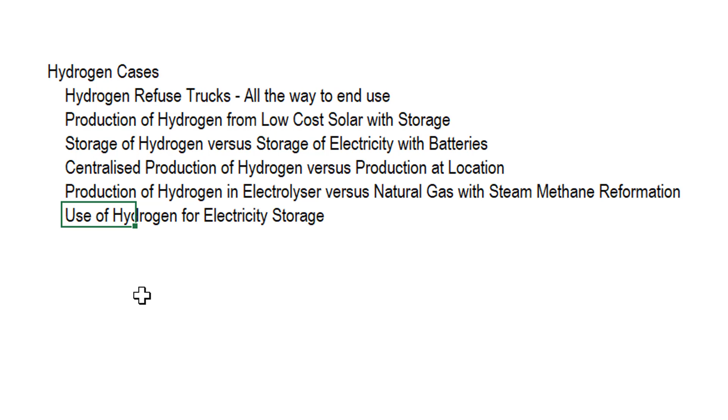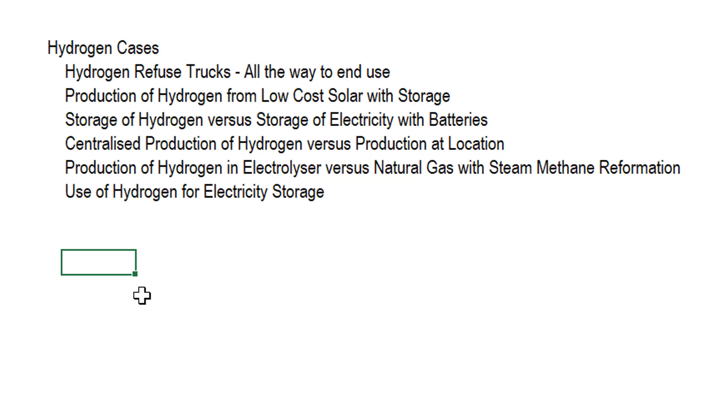And finally, there's this business I'm just hearing about of some kind of perpetual blah blah blah, where the idea is to get solar panels and use the solar panels to produce hydrogen with the electrolyzer, store the hydrogen, then get a fuel cell and basically use the hydrogen as a battery. So those are some of the issues. I hope to have more, and we can do any of this by just creating an LCOE calculator.

Okay, I'm not going to go through making spinner boxes and all that. Let's say we have a high load factor for our electrolyzer. This is only the electrolyzer. You get power, and you put the power into an electrolyzer, and that produces the hydrogen. Later, you might have to store the hydrogen, compress the hydrogen in order to store it, dispense the hydrogen, and get it out here. So there are a lot of parts to this. And I hope I got them right. Maybe I didn't.

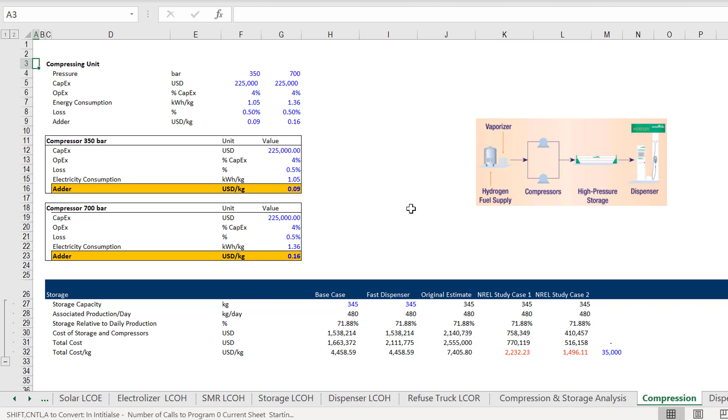Okay. Now, this is getting apparently pretty easy to get. What we did is my friend, I hope I have his name pronounced correctly. He's wonderful. He's been studying, and he's an engineer, and he goes through all these formulas with me, and he's collected all this data. When he collects this data, by the way, it's really interesting. Some people try to argue what the cost of all this stuff is, and then they give you these PowerPoint slides. And in these slides, they say, here's the cost of hydrogen, here's the efficiency and the cost.

And you don't know how it's done, but it's not so hard. Once you get the levelized cost calculator, you can do this yourself. You don't have to rely on some PowerPoint slides and some experts from NREL or someplace to do this. And so he got these different electrolyzer estimates. And then

the key thing is this thing. I don't really understand it, but let's go with it. I don't care, it really doesn't matter. When people talk about the cost of one of these things, they express the capex, the cost, in terms of kilowatts, which is an input, not an output. I don't quite know why you wouldn't express the cost per hydrogen produced, but this is for the capacity.

I guess you could measure in kilowatts, and then we're going to convert the kilowatts to a kilogram of hydrogen, which is the primary measure. And then we've got different efficiencies for different units, and this is like a heat rate that I'm used to in natural gas. The kilowatts is the input, so if we have more inputs per output, it's worse.

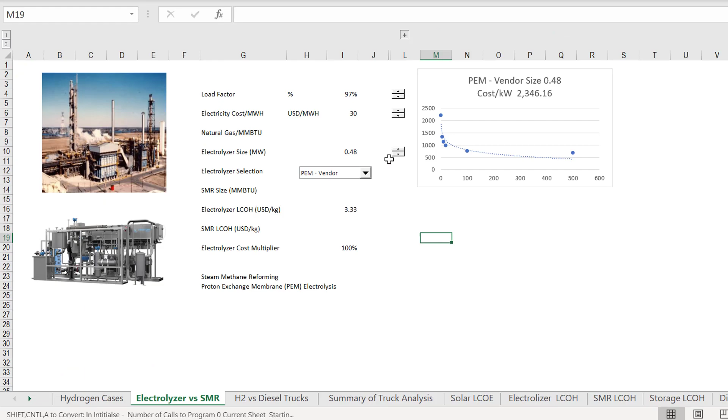The efficiency is different, and this is a proton... ooh, I can't remember the word. I had to write it down. Oh, this is a proton exchange membrane. Okay, good. And there's an alkaline. And Maximiliano says the PEM is better for the environment, and I need to ask him again why.

And then there's some other technologies with different costs and different efficiencies, and we've got to incorporate all of that in our analysis. And this database here, we have the different sizes. Where's the MW? We have larger sizes and smaller sizes and all of this. And what we can do then is just put this together. And where was my electrolyzer analysis?

So here's what you can do when you want to make a graph. I want to make a graph, and I want to put a line here, and I want to say, okay, what's the cost per kW, and how much does the cost go up if the size changes? And we have this data. Now I guess I'll explain it later, but if you want to make a quick graph, just delete the little

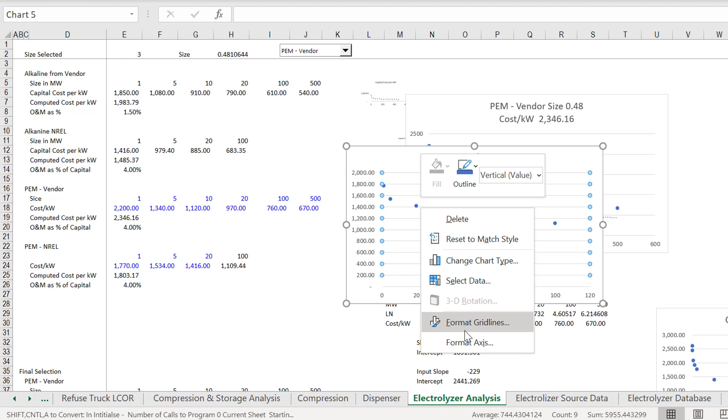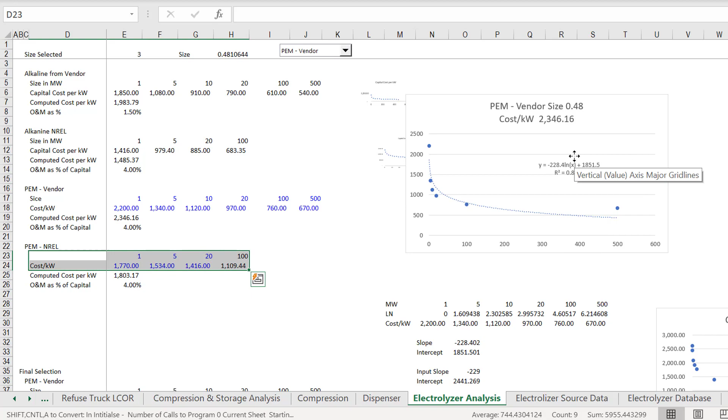thing here, press maybe Alt F1, and then change it around and make it an XY graph, and then just throw this in. Okay, I gotta click on this one, I guess, add a trend line, and get a... a logarithmic. Let's get that, so we can then get some estimates of the economies of scale. Okay, that's the first thing.

Okay, so we can get the cost. This is purely the cost to produce hydrogen. Now I'm going to, of course, go through the detail and try to drill down. What happens if we have a really low cost of electricity? What happens to our cost of our electrolyzer? What happens if we have a different kind of vendor? And what happens if we have a larger versus a smaller kind of unit?

Now, that's a little bit premature, and I haven't put the steam membrane... what was it, steam methane reforming? I haven't done that one yet. Okay, but let's get to the case we're really going to do, which is these refuse trucks. Now, here's an example of a hydrogen refuse truck.

And Mario, if you think because you gave me a picture of this that's violating something and I'm going to take down the video, I'm not going to do that. Sorry, because I got friends who might be interested, like one friend.

Now, this one is a nice diagram. This came from Frederick in the Netherlands, who's been really, really helpful on this stuff. I haven't ever talked to him, and I want to talk to him, but he says, let's take the power in here. I've already shown you this. Put it in an electrolyzer. So we've got to put the LCOE of the power that comes in here. And if you sneak, you can see I've got the LCOE of the power.

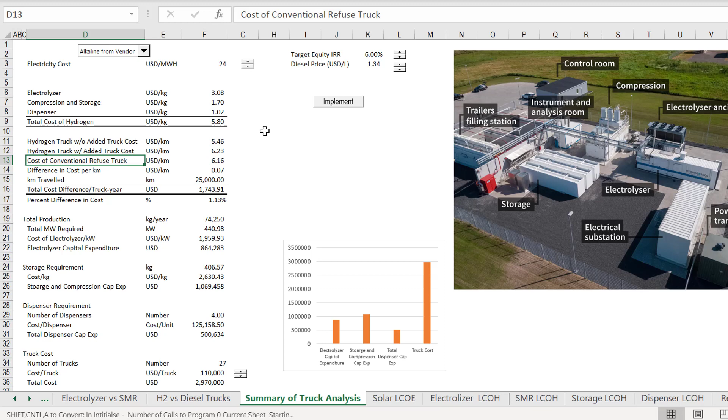And so all we have to do is get a flexible enough financial model. Remember, I'm just an old financial modeler. Okay, and at the end of the day, let's start at the end. We'll get the cost of hydrogen, including all the storage and all that. And then we'll see what the cost of a conventional refuse truck is. I'm not saying lorry because in Australia, I guess they use truck.

And then we get the difference, and then we see how much distance, and you can get kind of how much, in this case, the hydrogen costs more than the refuse. Not surprising. Probably costs a lot more, and it depends on all of these different variables, not the least of which is what kind of rate of return do we really want. Okay.

Now I had to press that for a minute. Now let's just go through some of the assumptions, and for me this is a lot of counting, and there's going to be a problem with storage, which seems to be an inventory problem. Now, let's start with how many kilometers. I kind of start with the demand almost. How many kilometers are we going to drive our truck? So this is all disguised. You can argue that these are a little bit different.

Okay, and then we see what kind of efficiency measure, and we call one of the suppliers and they say, okay, here's how many kilograms you need for a kilometer. Like this would be if you're not in the US, liters per kilometer is a conventional truck. It's just a measure of how much stuff we need to make a kilometer. It's got some efficiency buried into it. So in that case, we need this much hydrogen for 1 year if we're going to have this many trucks.

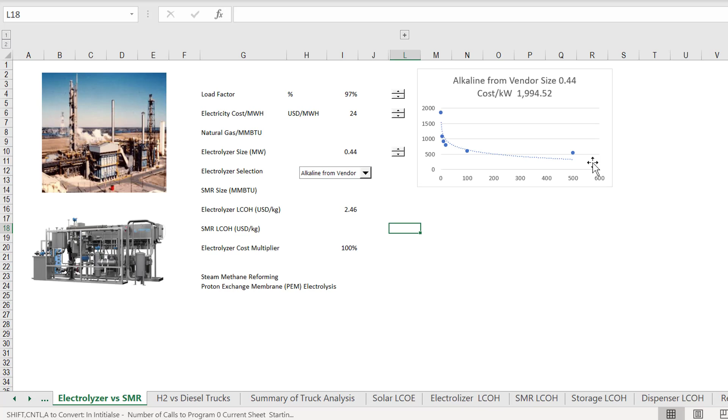Now when I did this, I didn't put the scale here, sorry, because when I make these XY charts, there must be a way to automatically make the scale. I should know that. But this is the megawatt. So we're way down here. We're tiny. And we could either compute this with a line, or I used my little interpolate function, which maybe isn't the best.

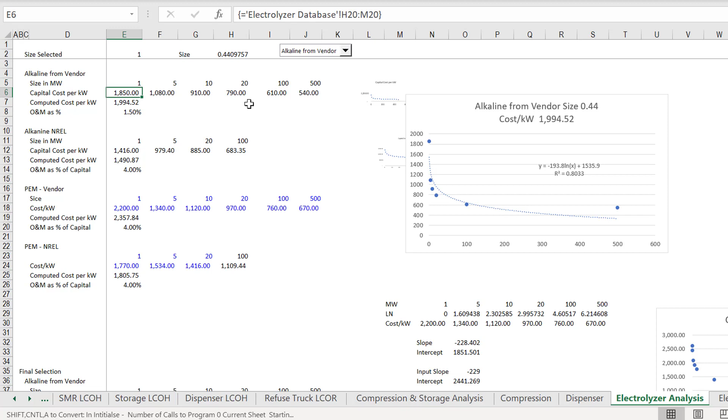So when I did this, and I'm just thinking out loud, this doesn't really have something less than one. We don't know, if this was really small, how much it would go up here. And then I try to do some curve fitting. When you make one of these curves, by the way, it puts the thing here, but all you do is take the megawatts and take the log of the megawatts, and then you put in the cost because that's our data, and then we can get a slope and an intercept.

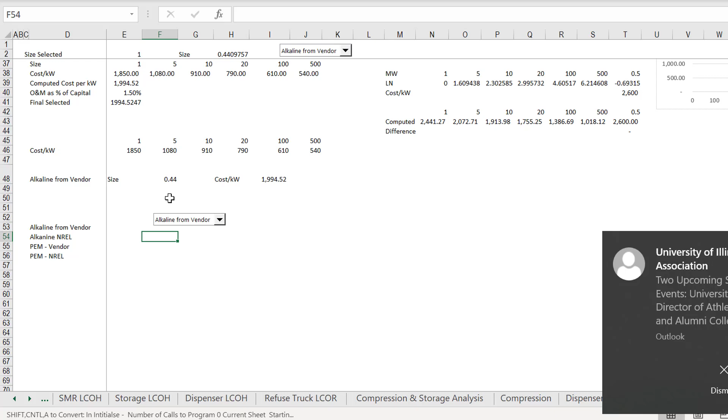So I suppose instead of what I did here is when, oh, I don't care about you. Let's not, don't hold that against me.

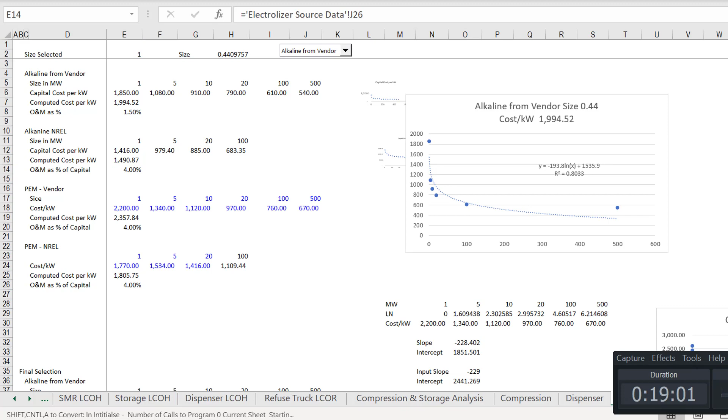When we choose a size, this is less than one megawatt, and then I interpolate, and I'm going to pause the video for just a second. So that was a little bit embarrassing, but I don't really have something less than one. I just added a little bit of a ratio to get the less than one. So if we have this size, we can then do a little interpolate function. I'm not going to go through it right now, and you can get it in a couple of seconds from the generic macros these days. You just interpolate. So right now, if I have 0.4, we're somewhere between this and this.

And the other thing I can do is I can try these different data sources. We get different data sources from calling a vendor. Let me see. This one is a vendor, and this one is the NREL. And there were a couple of averages here. And then what we can do is eventually go down and put a code number. This code number is normally 1, 2, 3, or 4, and we can add a fifth or sixth one. I'm going to put a selected input. Input selection, just input. How's that?

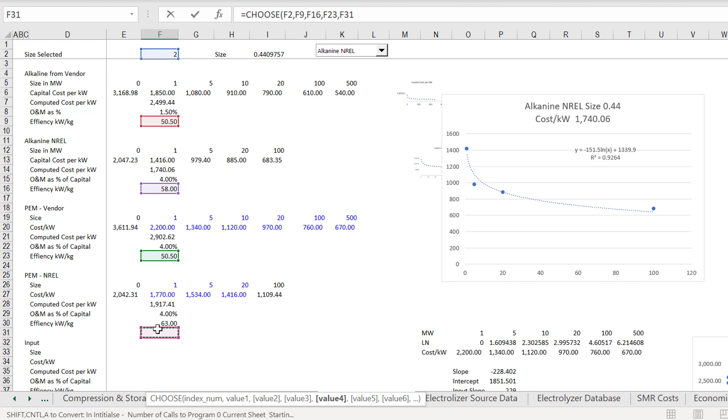And I didn't have the appropriate efficiency in. So if it's 1, we'll take this one. 2, this one. 3, this one. 4, this one. And 5, we'll take the last one, which we haven't filled in yet. Okay, and I'm going to work through this a lot more. We're going to go through our electrolyzer technology, and in this one I'm just going to take this from our electrolyzer analysis, so we can make sure that if we switch this around, we get our different efficiency and cost. We can see which would give you the best option. Okay.

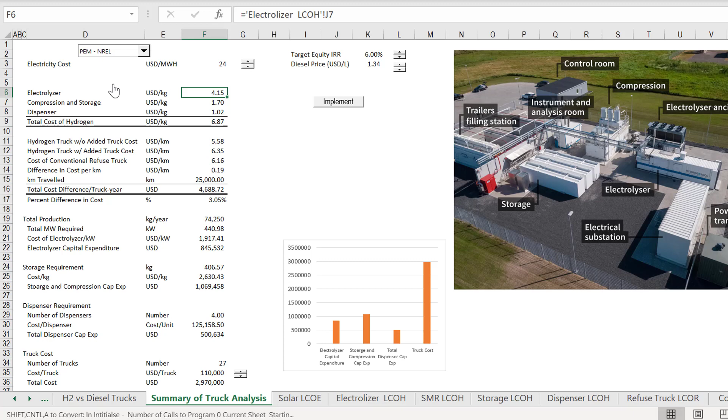Just a little bit of background. I'm going a little bit back and forth, and I apologize for that. And then we're going to make an analysis of each one of these. And I've tried to, in this database, put the cost of a dispenser. So a little bit down here, we have the cost of the dispenser, we have the cost of the compression and storage, and it's all a little tricky for me.

And the first thing that I really need to get to before we start putting all these costs in, we have to figure out how much storage we need. Now, I think I stopped here somewhere. I think this is the size of the electrolyzer, which is really tiny, and then we decide how many trucks we have. So let's make a big fleet, 100 trucks. I don't know how many a town has. That would seem to be probably a pretty big place.

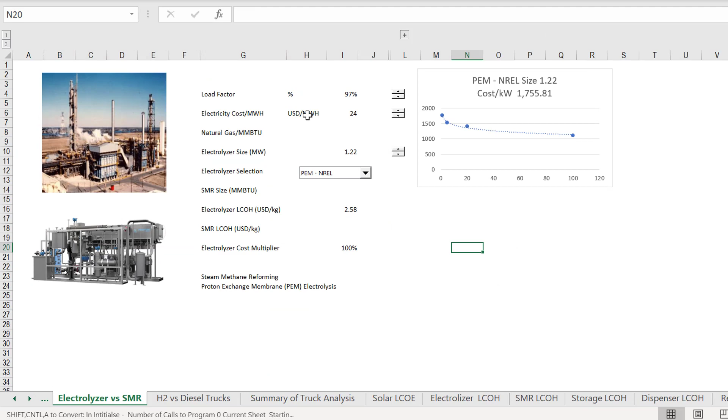And then now, because we have this, we have a bigger electrolyzer. We have 1.22 megawatts for that one. This many kilowatts, so divided by 1,000, you get this many megawatts, and then you can get the effect of the economies of scale. That's what I was trying to get to. Okay, now once you have this production, you're going to produce it 97% of the time for 8,500 hours out of 8,766 hours.

All right. Okay, we're going to get that total production from the electrolyzer across the year. And it doesn't have two E's there. Okay. And I suppose I should be really careful about these, whether it's a year or this is just an instant. This is a year. Okay, and here's our production. Now that means if I divide this by 365.25 for the leap year, for the February 29th of every Olympics year except this year, then you get the amount you produce daily.

But you know, we don't make people work on a Saturday or a Sunday. So I've got to take this production and we're going to use it each 5 days and dispense it out once a day. I'm going to assume we dispense it out once a day. So how much storage do we have if we're going to produce this every single day?

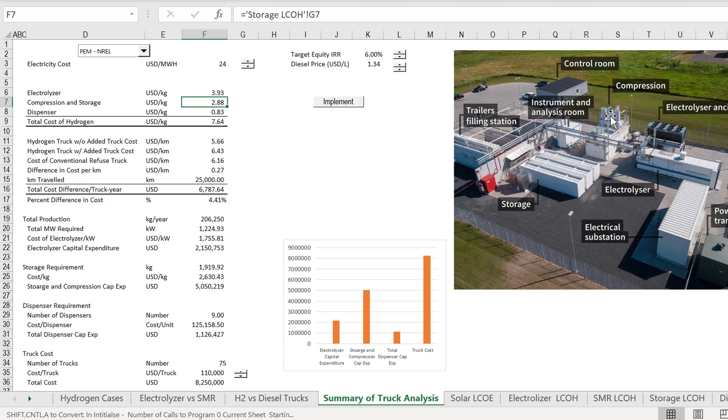So for the required storage capacity, this is how we measure the storage. It's in a tank. You don't measure it in kilowatts or anything else. Now, let's look at that. When you store this hydrogen, you also have to compress it before you store it, and this takes some electricity to compress it. And then we put it in these tanks, and then we get it out with a dispenser. And it doesn't show other equipment.

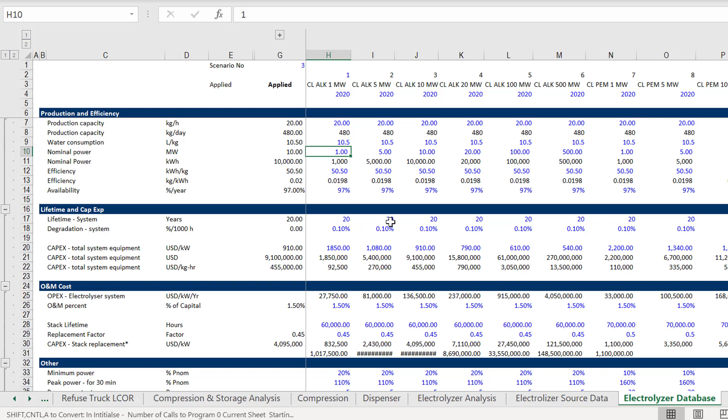Okay, enough. Now, again, Maximiliano gave me this data on storing, and it was all kind of complicated. He gave me some specs here. You have to compress it, and when you compress it, it doesn't tell you how many kg you have. All it does is give you a unit for compressing on a high pressure or low pressure. But when it gives the storage, here's a storage unit, and it gives you how many kilograms you have in that storage unit.

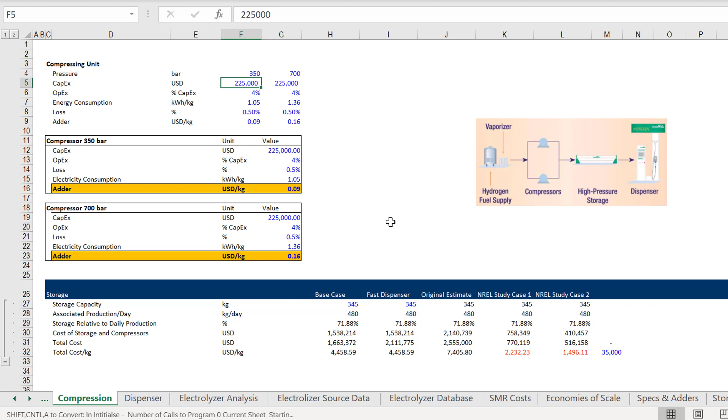So what I did is just put the storage and the compression units together. Of course, it's free, this video, so I could have made mistakes. I probably did. And we start with how much kilogram storage we need, and then we figure out how much kg is in each unit, how many units you need, so you just divide this stuff out.

If you learn how to cross multiply and divide, or cancel things out, that's all you have to do, and then you get your total cost of storage by multiplying it by how many units you have, and I suppose you could round this up or down, and then I get the cost of the storage.

But when we figure out the amount we compress, that's a little bit different. We've got to figure out how much the compression costs per unit, but when we compress this stuff, we're not back to the maximum amount of a storage tank. We're in how much we really produce per year, because that's going to have to end up getting compressed. You might lose some things in between, like in a battery charging and discharging, and I don't have that in. And then eventually we'll go through our storage.

And I hope, I'm trying to, my friend said, don't make this so complicated. How can you not be a little complicated? You've got to go through item by item, and then you can see how many kilograms we have, what's our total upfront. I'll call this CapEx. And then we figure out, well, what are our operating costs? For the operating costs, you need to know how much you produce per year, and what your general overheads are.

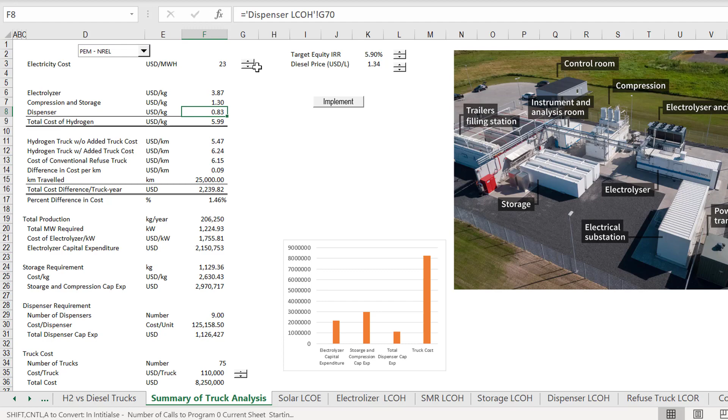And once we've got the storage, then we said, okay, well, how much? Remember, we dispense this for 5 days out of the 7 days, but we can buy a more expensive dispenser or a slower dispenser, and they're measured. You measure a dispenser not in terms of the total amount, it's the amount per minute you can get out. You can get a fast one or a slow one, so we say, okay, we want to dispense this in half an hour. We don't want people sitting there forever.

Okay, and if we do that, then we take our total kilograms and we figure out how many we have per minute. And then we see what the capacity of each pump is, and we figure out how many pumps we need. And then that's the capital cost. And there could be some fuel associated with the pumps, but this is a flow. This is per minute. This one was a capacity that's just purely fixed. This one was also a capacity, not a flow, which was the electricity, and then we had to use the load factor. So we got all of these.

And finally, last but not least, and anybody who says I'm taking something confidential, that's BS. The last thing you've got to do is figure out, well, how much extra is the truck itself going to cost?

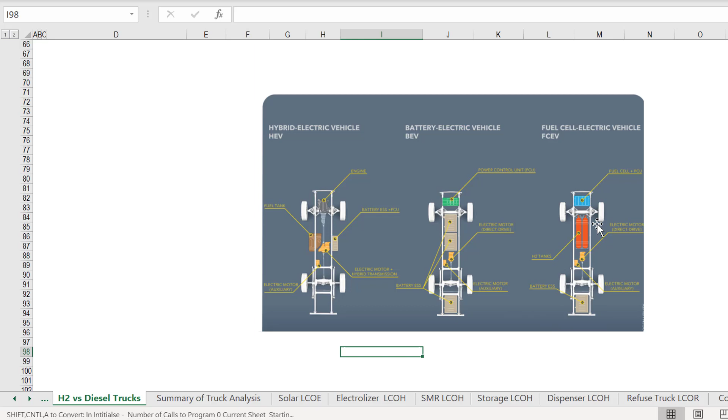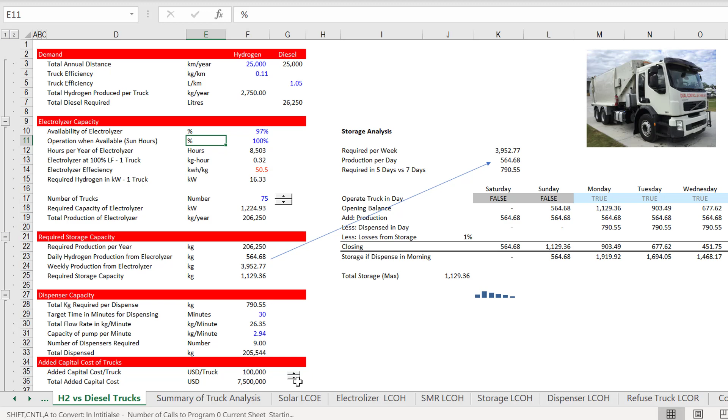And instead of just throwing numbers around in some PowerPoint slide, in my opinion, every time somebody presents an LCOE in any kind of PowerPoint slide, they should give you an Excel file just like this, and you just put your numbers in, and then you're finished. And the question is, right now, how much extra are the trucks? And in the future, what kind of different materials do the trucks actually use? And in the future, how much more will they cost?

Now, before we go through our final analysis and do a little bit of sensitivity analysis with different required returns and other things, I'm going to review for the umpteenth time, and I'm sorry about this. We go through our solar. And does solar not look easy now? All we need to know is a capital cost. Here's the cost per kW, and here's a cost I got in an island of India or something like this. And then we need to know how much we utilize that cost, if we have a fixed cost, like a factory, and you can only use it 23% of the time, which is good for solar, not bad at all.

Then we spread that cost over the number of hours. And then we have to add some operation and maintenance, and we do all of this at the top. I've gone through it before, and you can go through it yourself. What you need to do is put some returns and some lives and some taxes and some debt, and you have a few little PMT formulas. Another video goes through all of that, and you figure out the real carrying charge and the nominal carrying charge, and then you get how much capital you have to recover instead of all up at once up here.

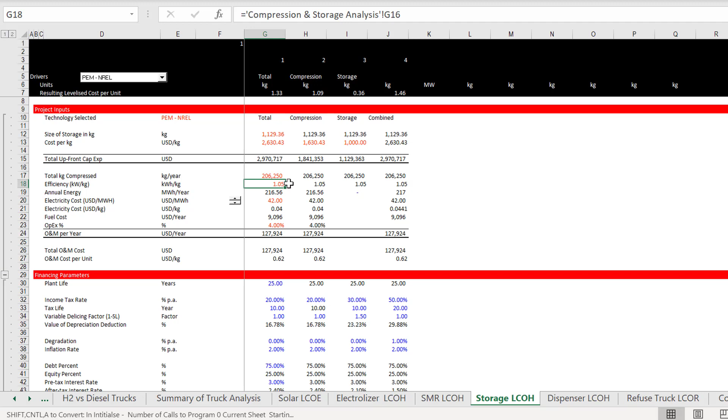Remember, this storage came from that little analysis we did, and this came from how much we produce. And there might be some losses and all of that in between, and you can factor that in. Okay, and then you figure out how much electricity you use for compression, which is, I'm being told this is right, you need a whole lot less for compression than the electrolyzer.

In fact, the annual energy is here, and then the electric cost is here, which is not a big number compared to 4% of the capital. Okay, and that's, again, the number given by some kind of supplier. And then you get your O&M and upfront cost.

What I should do is insert a line here, because we have our three things, our production, our O&M, and if I've done this correctly, then the O&M per kg is down here, and we have to adjust it for inflation, and then we get finally our real and nominal things. And this is just an Excel shortcut, Shift Control 7 if it's on a US keyboard, I guess. And so this is the number I take, the combination of the compression and the storage.

Again, you just have to work through a couple of things up front here and leave the rest of the formulas. Look at the formulas, nothing very complicated. Well, I shouldn't quite say that, but it's all there. All of this, you can change the lives and all that. I made the plant life longer because I was afraid of this. If we make the life of these tubes 20 years, 20 years sounds like a lot.

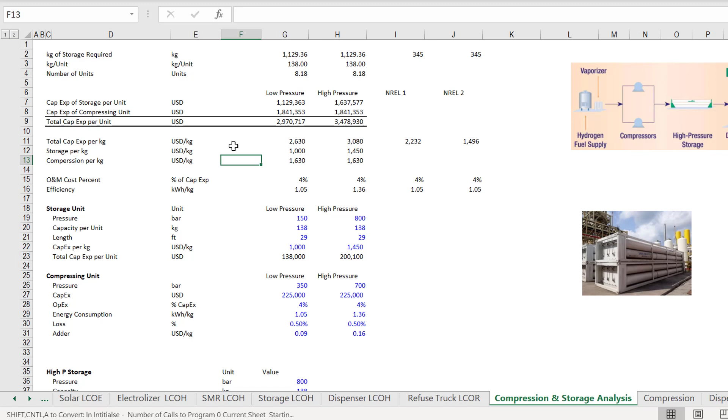Let's put 30. Okay. These all inflate, by the way. All the O&M costs inflate in this mechanism when you use the real cost. Okay. And right now I'm getting a higher cost. And then we go to LCOR. We make up a new thing, not LCOH, not LCOE, LCOR. And this time, we'll just get one truck.

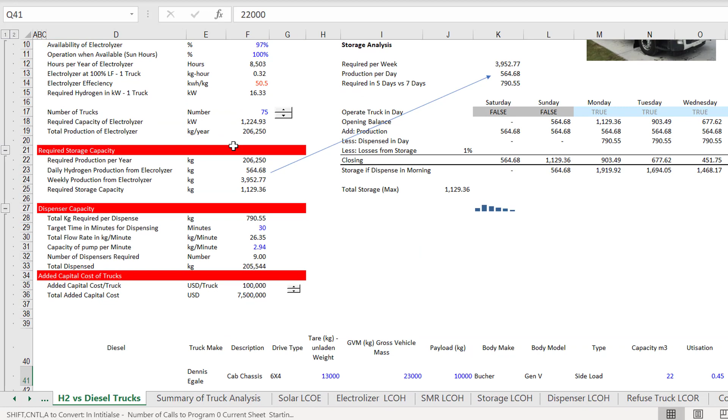Here's how much we travel per year. Is this the amount? I should be using a different number. Sorry about that. Okay. And this, I'm going to use the hydrogen. Again, there is nothing proprietary in any of this. Okay. And then this is the cost, I'm assuming, for a conventional truck, and then we get how much more we are going to spend for our new trucks, and the additional amount.

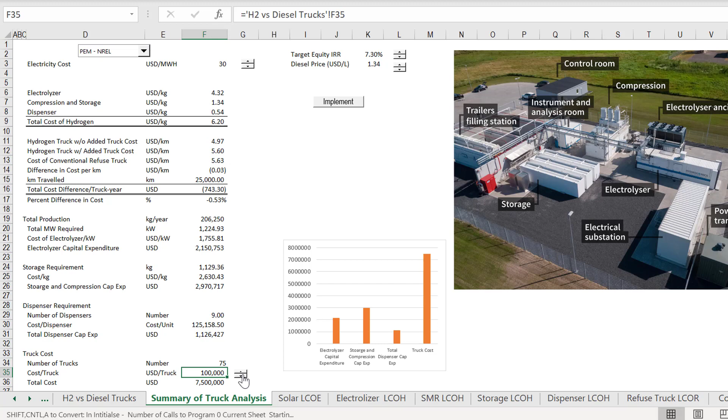The problem is, I wish this was easier. This is F35. Whenever you possibly can, just put one cell in Excel. This is this additional amount. And I'm not going to tell you the top secret amounts that you're getting estimates for. But, okay, let's put this amount in. Okay, that's how much we get.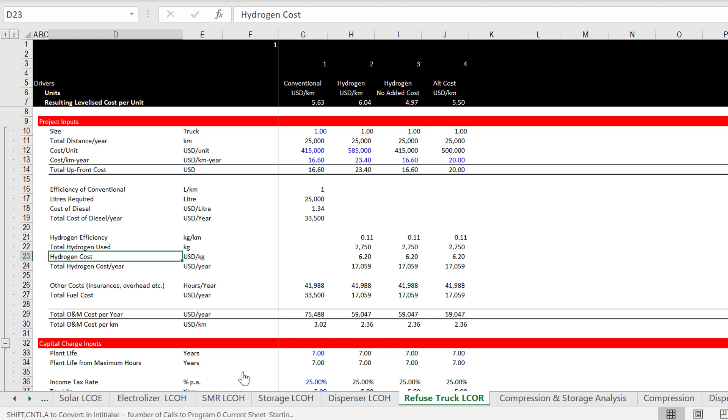And then, oops, where am I? I'm already on the truck. And this time you notice that we have our upfront cost per year. This distance per year really is our production. I should have maybe put it again here. I didn't, but if we have a conventional truck, here's our distance, here's the diesel amount, and this time you can find it and press F5, control square bracket and F5, and I allowed you to put a higher or lower cost of diesel in, because that's going to make a big difference if we have to spend more for diesel. Okay.

And then with the hydrogen, we have a different efficiency, and we do our cross multiply and divide, because you just multiply that total distance in km by the kg, and you get the total amount of kg you have, which is a whole lot less than the liters of diesel you need, and then you get your total hydrogen cost. And in this scenario, I didn't put any additional cost for the truck. What happens if, for some magic reason, we didn't have to pay any extra? Look, in that case, the hydrogen would have given you a lot better cost.

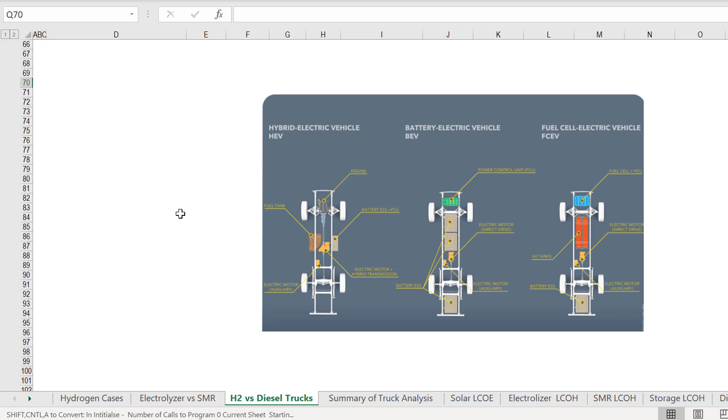And maybe one day, that would be so cool, if everybody in the world starts building these trucks, the fundamental cost of a truck would come down. What's the inherent cost of this? Well, this is a hybrid, but what's the inherent cost of one of these versus conventional? Maybe one day the cost will come down. I don't really know what's going on in electric cars,

because I told you I hardly ever drive, and then I have this van that I used to cart my dad around in for his wheelchair, and it's all falling apart and it's rusted. Enough.

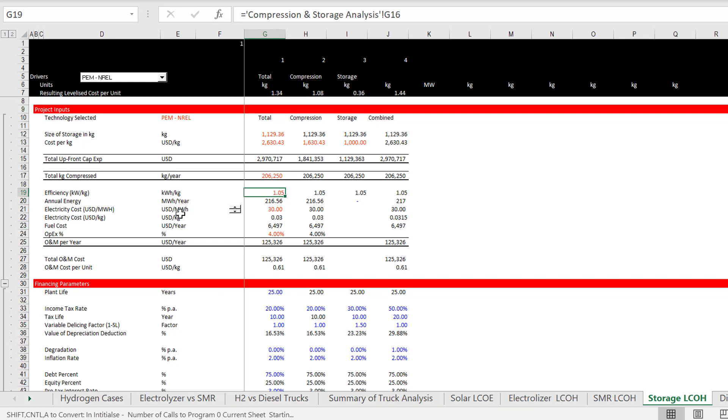Okay, so I'm not in the right place. Here's our LCOR. R stands for refuse. Okay, LCOE, LCO distance. I don't know, we could use T for truck. Or lorry if we're in England. Okay, so we have our total hydrogen cost, and then there were a bunch of other insurance costs, and we have the fuel cost, which is a lot less. So we have to somehow make a comparison of this to this.

And they say a truck only lasts 7 years. If we make a truck last 10 years, we're going to get a very different answer. I don't know why it only lasts 7 years. Let's make it 15 years. I think 7 years is the kind of answer we had. Maybe that's because they want to sell more trucks. And then we get the cost per kilometer. If it's only 7 years, then the capital is bigger than the fuel. If it lasts 15 years, then it's lower. We've got to figure all that out. All right, I'm going to put 10 here as a compromise. Okay, and then we go all the way back.

So the real lesson here is don't be afraid. Isn't modeling kind of cool? It's creative. It's not following some blah, blah, blah.

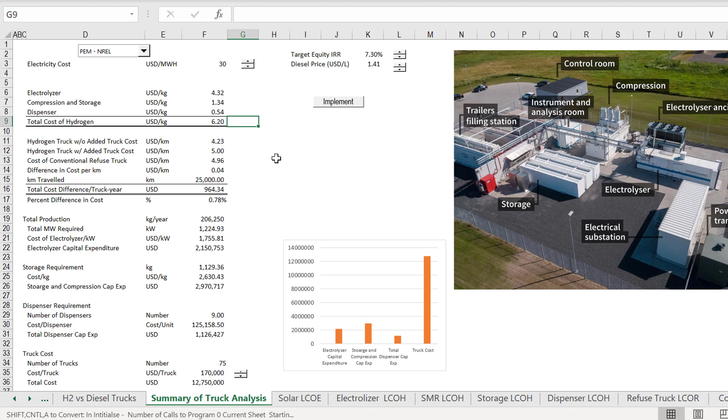Kenny Whitelaw is my friend. We go to the pub. He's the inventor of FAST, and he has his people do all this stuff. I hope he doesn't get pissed off. And then he takes his Mac out and talks about his rules. And I love his philosophy, but his rules I can't take. Sorry, Kenny. Kenny's the best. This was not a negative thing. His philosophy on making flexible, accurate, structured, transparent models is the best. So that was totally not a bad thing to say.

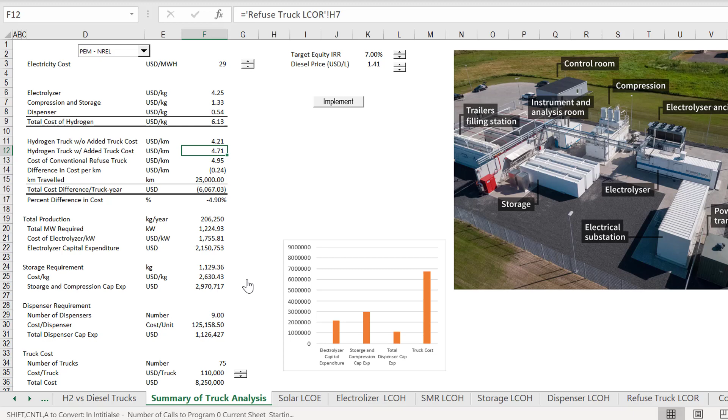Okay, I take anything back I said. And then we can see what kind of price of electricity we need to make this work. Or alternatively, what the truck price has to be to make it work. And then we can look at this and get a whole break-even analysis, and let's put a reasonable cost of capital in, and this is starting to look a little bit better, and maybe we can find a strategy that really works. This is kind of exciting, if I haven't done anything wrong, which I'm sure I have. Okay, the trucks have to have a longer life.

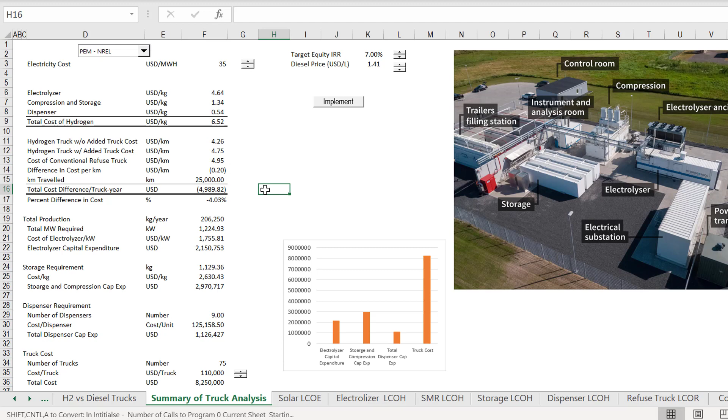We've been through a lot of the issues, and I'm getting tired of talking, so this is the end of this video.